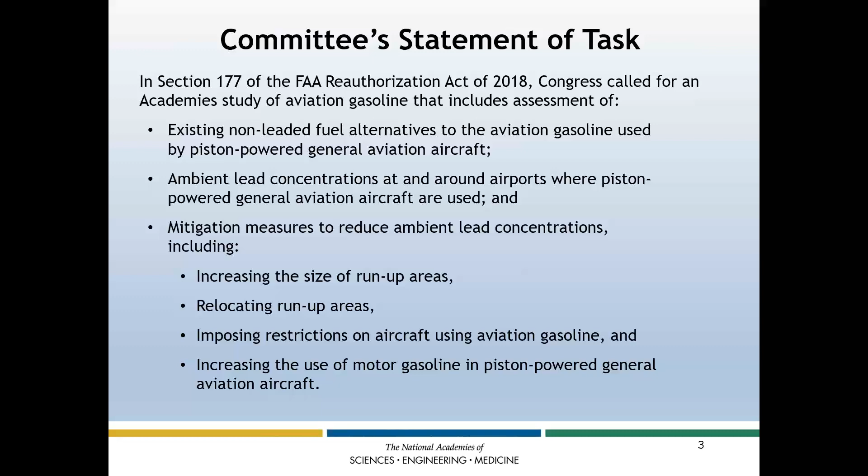Let me start by reviewing what our committee was chartered to do and how we operated. Our charter was created in Section 177 of the FAA Reauthorization Act in 2018, where Congress called for the National Academies to study aviation gasoline with an assessment of existing non-leaded fuel alternatives to the aviation gasoline used by piston-powered general aviation aircraft today, ambient lead concentrations at and around airports where piston-powered general aviation aircraft are used, and mitigation measures, calling out several as shown here, as examples, non-exclusive, of the mitigations the committee examined.

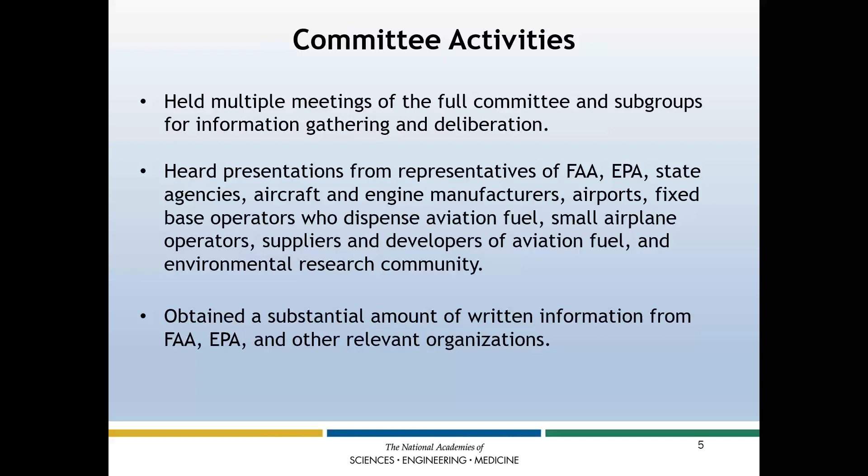The committee held multiple meetings of the full committee and of subgroups for information gathering and deliberation. These meetings included presentations from representatives of the FAA, EPA, state agencies, aircraft and engine manufacturers, airports, fixed-base operators who dispense aviation fuel, small airplane operators, suppliers and developers of aviation fuel, and the environmental research community. This was supplemented by a substantial amount of written information, and I'll note that all of the information received is in the public record.

So now, stepping into the findings and recommendations of our report. First, in Chapter 2 of our report, we outlined the findings we had as we researched general aviation, the background of what general aviation is, to help better understand the scope of the problem here.

Let me start by outlining the functions provided by general aviation. Of course, it's common to think first of the recreation and personal transport function, small aircraft owned by personal individuals. But we also recognize there are many other functions provided by general aviation. These include transport and medical evacuation, or medevac, in remote areas; flight training, even if a pilot is planning to fly large jets for an airline, general aviation aircraft are where their preliminary flight training is first required, serving as the bridge in training for larger aircraft; and law enforcement, search and rescue, and firefighting, examples of roles often undertaken by local law enforcement or other government agencies.

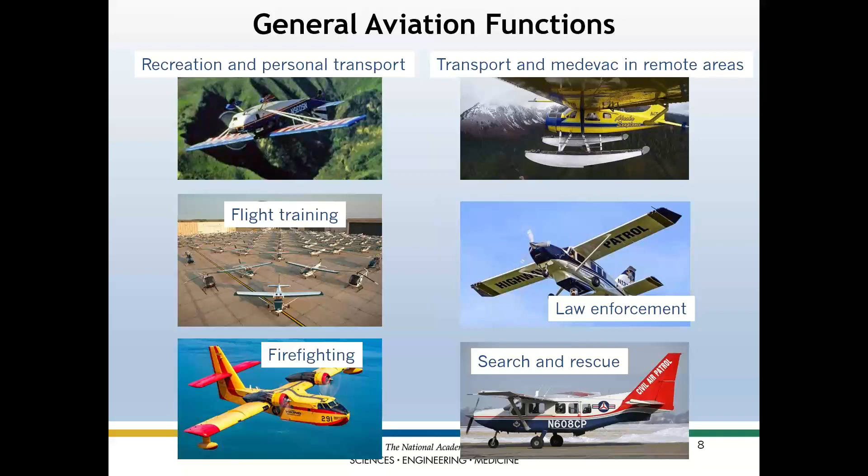Looking at piston-engine aircraft, about 170,000 are operating in the United States at this time. They serve many purposes, but fall into two broad classifications. Those personally owned, used for personal and recreational flying, comprise about 75% of the fleet. They're less heavily used.

Those used for business, government, and commercial purposes, while only 25% of the fleet, are estimated to represent 50% of hours flown. They're estimated to consume more than half the avgas, as they tend to be larger, higher performance airplanes that burn fuel at a faster rate.

Of these 170,000 aircraft, annual fleet turnover is very low, with an estimated 900 new aircraft added per year. The average aircraft age is estimated at 50 years, and designs have stayed fairly constant, especially airframe and propulsion technologies. For example, the Cessna 172, shown lower right, first built in 1955, is still in use and still in production, with much the same airframe and basic engine technology.

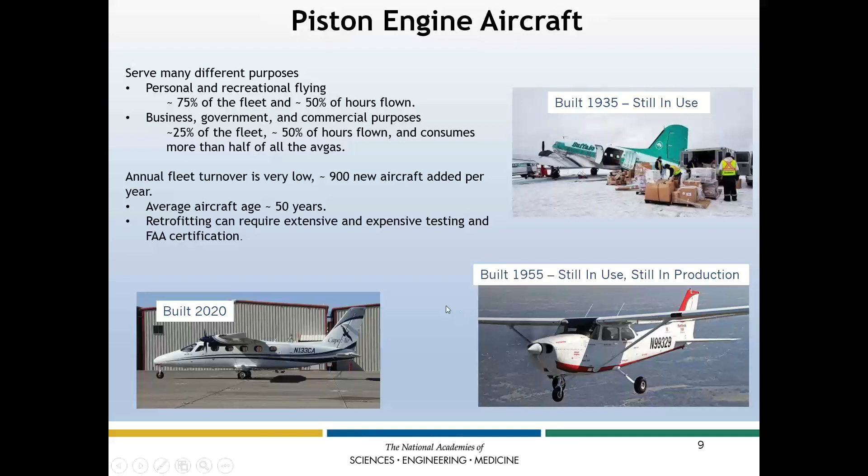When looking at lead emissions, it's important to look at the airports. Of the nation's 13,100 different airports, about 75% of the fleet is based at roughly a quarter, or 3,300 airports. The larger, busier airports are often publicly owned by municipalities, counties, or states, and are in the National Plan of Integrated Airport Systems, or NPIAS, making them eligible for federal assistance.

However, the other 25% of the fleet is based at the remaining 75% of airports, or 9,800 airports, that are not under NPIAS. Many of these are small and have limited capacity to add fueling infrastructure or to assess the lead impact of their airport layout.

Another important distinction is how different airports are. I've shown Van Nuys Airport on the bottom, which by some measures is the busiest general aviation airport in the nation, and an airport in grass with no tarmac, near my house on my drive in to work.

They have very different infrastructures and capabilities to do assessments, change their layout, or change their fueling mechanisms. They also often have very different proximity to people.

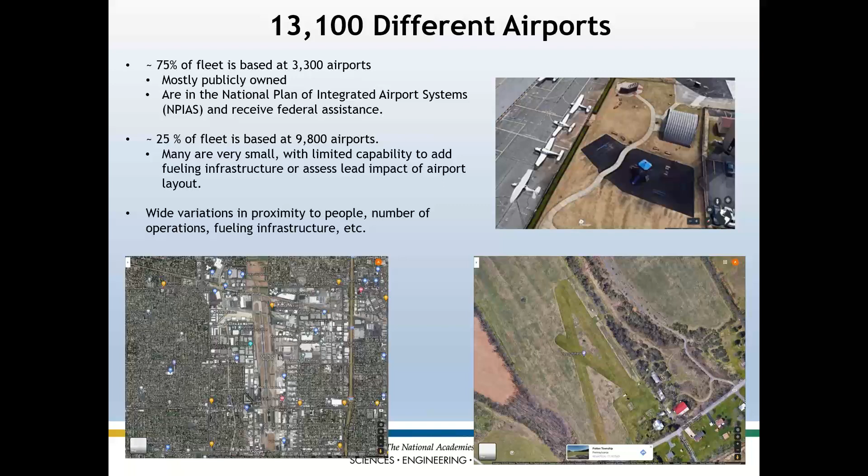Looking at lead emissions from piston-engine aircraft, one thing I learned as an aerospace engineer is that lead persists. Often with other emissions, there are assumptions that organic compounds degrade and decompose, but lead instead persists in the environment, and once emitted, it accumulates.

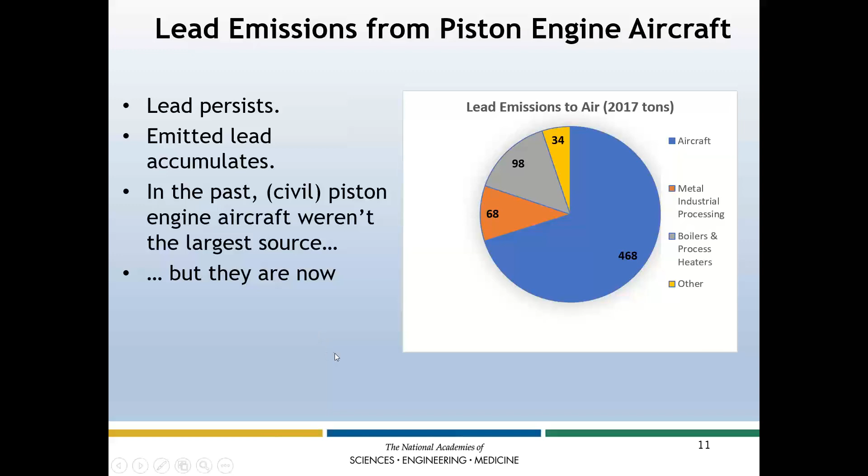Over the last decades, lead has accumulated in our environment from a number of sources. In the past, civil piston-engine aircraft weren't the largest source. However, as other large sources of lead emissions have been mitigated or eliminated, general aviation aircraft are now the largest source of lead emissions, in the context of lead having accumulated and knowing there's no known safe level of human lead exposure.

Together, the importance of reducing lead exposure is recognized by our report, and it motivates the development and implementation of measures to reduce or eliminate lead emissions and/or zones of high airborne lead concentration.

We note too that lead exposure can occur through multiple routes. The most evident in many of our research studies to date is airborne lead emissions impacting neighboring communities. But we also recognize that past emissions can be deposited in soil and other surfaces, and that occupational lead exposure for airport workers also occurs.

This can occur through multiple mechanisms: inhalation, ingestion, and dermal absorption. We can be looking at both combusted and uncombusted fuel. So there's a number of methods by which the lead can create exposure.

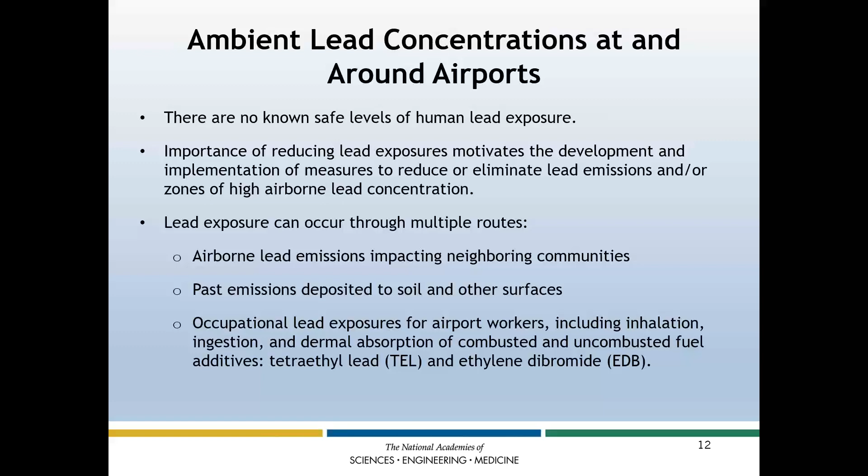Compared to other sources of lead emissions, we recognize that there are some unique aspects of aviation emissions. For example, a much smaller particle size than automotive emissions.

Studies of the health impact of automotive emissions may not translate well here, leading us to recognize that there are open questions about what the exact health impact would be. So the health impact is something we recognize, and that motivates the need for mitigations.

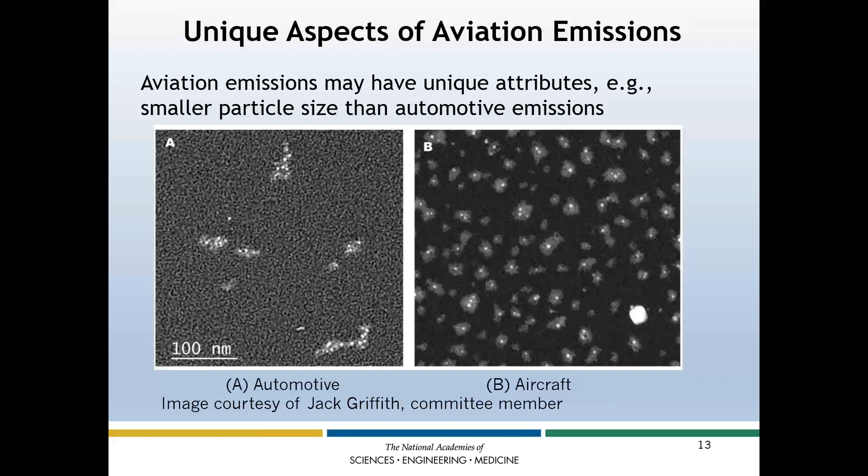Following our original charter, we studied a range of mitigations, and I'll call out two that cannot widely help in the committee's opinion. The first is that imposing restrictions on aircraft using avgas would not be a viable sole mitigation.

Restricting general aviation aircraft that use avgas, especially higher performance aircraft, would have far-reaching ramifications for critical functions that include transportation, particularly in remote regions that may otherwise have limited transportation options, ramifications for medical transport, and pilot training, among the broad functions outlined at the beginning of this talk.

Likewise, we looked at the use of motor gasoline, by which we referred to gasoline broadly produced for automobiles. But we recognize that motor gasoline as currently constituted today is not a viable unleaded alternative. Decades ago, some aircraft were listed as being able to use what was commonly called MoGas, back when motor gasoline did not have ethanol.

But with the addition of ethanol, we find that it cannot be used in the vast majority of aircraft. Ethanol can cause vapor lock, which itself can cause an engine to fail in flight, which is not a good thing for a pilot. And ethanol is corrosive to aircraft components. Yet without ethanol, automobile gasoline does not meet minimum octane requirements.

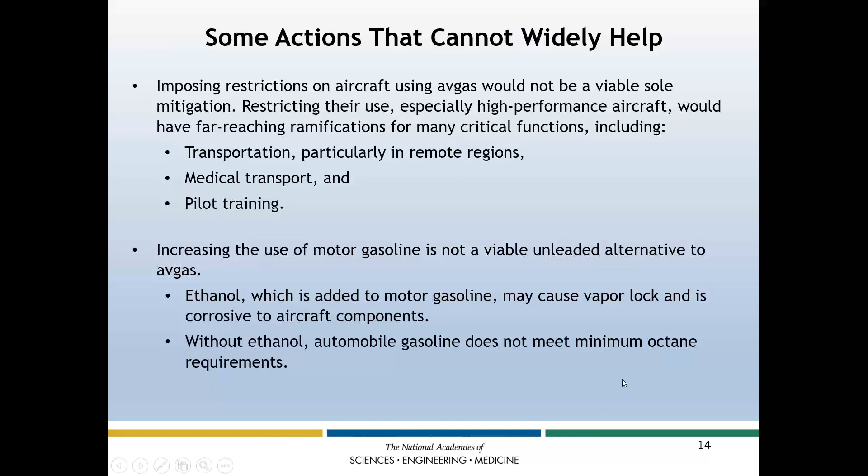From here, we would like to talk about the mitigations and actions that we do recommend. We recognize there is no single known technical solution that the committee, based on publicly available information, felt certain to be available in the near term. Instead, we recommend a multi-pathway approach.

We recognize that the ultimate development of a drop-in fuel, one that can be used in all current aircraft yet without lead, should be pursued and would be a good solution. We will talk about each of these in more detail next.

But also, we recommend examining parallel pathways: ultimate development of new propulsion technologies that do not require leaded fuels, and in the interim, some mitigation pathways focused on modifying airport operations and practices and on using existing fuels and aircraft to lower the amount of lead and reduce its exposure to populations.

This is a big, hard challenge, in that implementation will require the participation of many across a very diverse industry, including private, corporate, and public entities. This includes pilots, airport managers and personnel, fuel suppliers, aircraft propulsion, and airframe manufacturers.

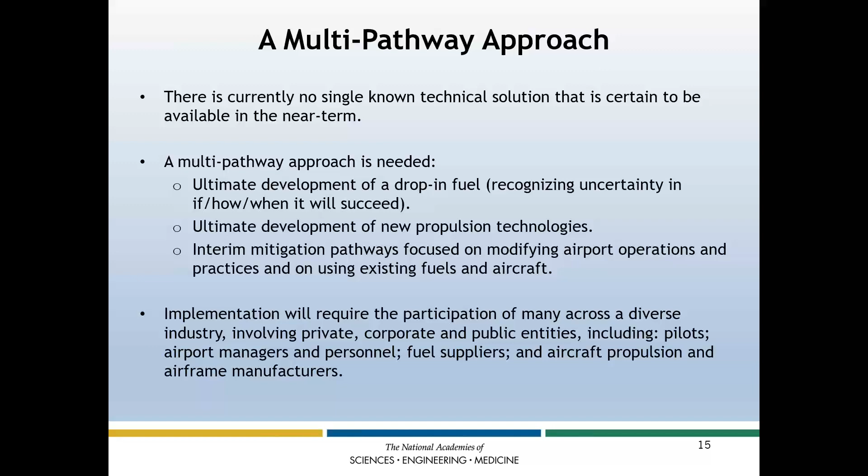So our first recommendation is that the FAA, recognizing and building upon what they have been doing so far, should further coordinate its efforts to reduce lead pollution and exposure at airports, coordinating with other federal agencies that have key responsibilities for protecting public health, safety, and the environment at airports. This includes their longstanding coordination with the EPA, but also other agencies such as OSHA that would be concerned with the occupational health impacts of lead.

We further recommend that they collaborate with these agencies to explore the regulatory and programmatic means within their respective jurisdictions that they can each bring to bear and combine in a complementary manner to reduce lead emissions and exposures at airports.

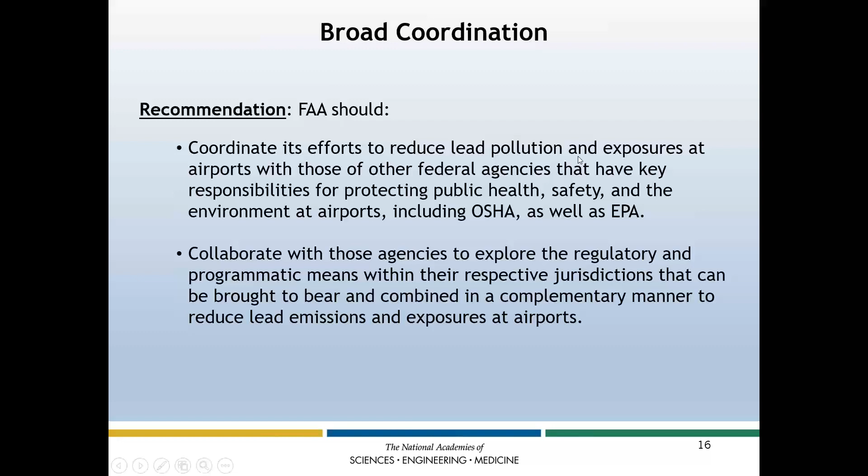Another thing we look at is pilot and airport personnel practices. These photos are snaps I took on my phone the last time I went out to fuel an aircraft at a nearby airport. I was curious, I hadn't really looked before. There's a lot of big signage noting the compelling concern that aviation gasoline is flammable and that multiple safety checks are needed. But was there a mention of lead?

It turns out, at least in this anecdotal case that reflects our broader experience, there's one sign you can see on the self-fueling pump where it says contains lead, but that sign is then obscured once one opens the panel to start fueling. I use this anecdotally to reflect the broad finding of the committee that there is scarce mention of lead health hazards in FAA-related materials for flight training, aircraft maintenance, airport management, and guidelines for refueling to avoid spills and emissions.

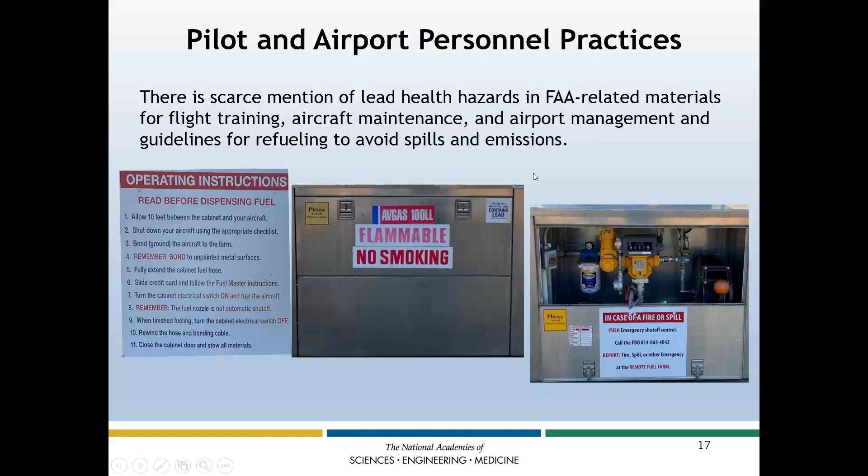So we recommend that the FAA should initiate an ongoing campaign for education, training, and awareness of avgas lead exposure that is targeted to GA pilots, aircraft technicians, and others who work at airports.

We recommend they partner with prominent organizations within the general aviation community. The campaign should be multi-pronged by ensuring that information on lead risks and mitigation practices is prominent in relevant materials for pilots, airport management, and aircraft technicians. Where appropriate, the information should also be covered in the relevant certification and licensure examinations. This information should be featured on FAA and GA organization websites and included in written materials distributed at GA industry conferences, trade shows, and fly-ins.

In addition, looking at airports, we recognize that the FAA has not updated its run-up area planning guidance to reflect the results of air quality studies that suggest the desirability of moving airport run-up locations away from where human activities occur, both on airport and in neighboring communities, and moving them away from high traffic locations such as runway ends where lead is emitted from aircraft taking off.

So again, based on my own experience, I brought in a satellite view from Google Maps of a particular airport known for having a Burger King, a Fairfield Inn, and an Izzy Steakhouse right next to the airport. I overlaid the airport surface chart, pointing out that there is also a run-up area on the other side of the chain link fence from these businesses.

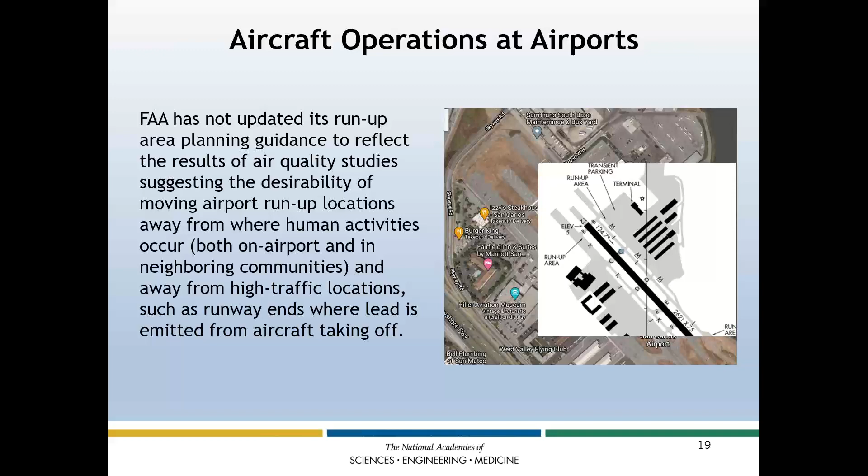So with this, our committee's recommendation is the FAA should update its guidance on the location of run-up areas to reflect the results of research since the latest interim guidance was issued in 2013. This guidance should include the need to account for both the emissions of engine run-ups and takeoffs, recognizing that these emissions may combine, creating even denser hotspots when analyzing the geographic distribution of lead emissions at the airport.

Indeed, the emissions here, we mentioned run-ups and takeoffs, also include places where the aircraft may idle while waiting for pre-departure clearance, and so forth, looking at where the lead is getting distributed. The purpose of this guidance should be to support airports' decisions of whether to move run-up areas to reduce people's exposure to lead emissions, while also accounting for other concerns, including safety and aircraft noise.

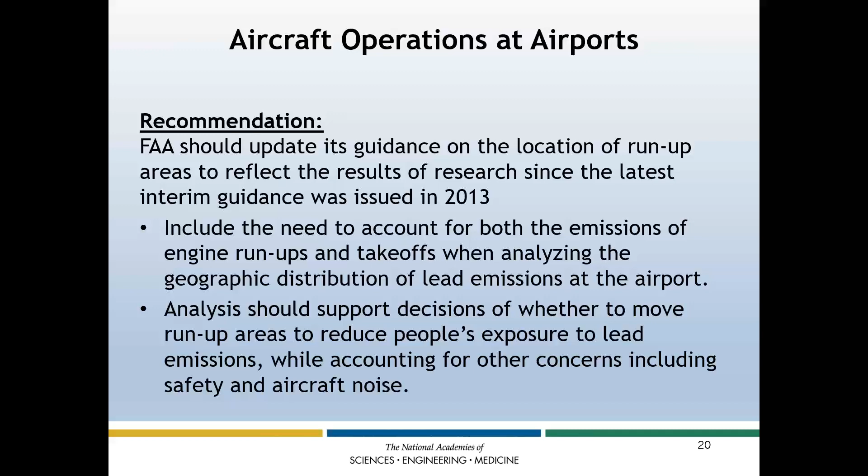So these are the mitigations and recommendations looking at changing aircraft operations in airports. Next, we looked at existing specified fuels and fleets.

We note there are two other fuels with ASTM certification that would apply to all or some of the fleet. Let me start with 100 very low lead. It has the same octane rating as the 100 low lead currently used, but its ASTM standard requires nearly 20% less maximum lead content. This fuel, if produced, could be used by all piston engine aircraft. The fleet-wide use of 100 very low lead could reduce total lead emissions from avgas by up to 20%.

Another fuel under consideration, usable by an estimated 57% of the current fleet, is unleaded 94, the only existing grade of unleaded avgas. It would require a second supply chain for fuel and a second fuel distribution system across the nation, including second fuel dispensing systems at airports. Consequently, widespread availability of unleaded 94 is likely to be restricted to a portion of airports that have or can afford to add the required fueling facilities.

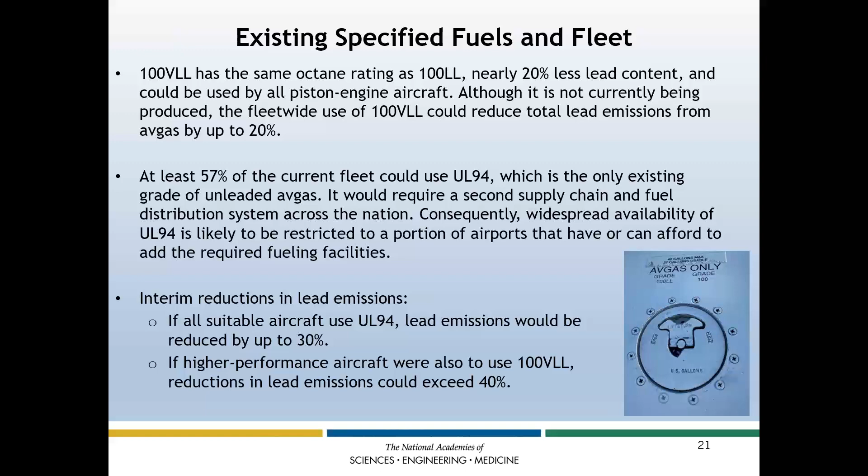Put together, we recommend looking at these two fuels because of the interim reductions in lead emissions that could be created through the use of fuels alone, while lead-free solutions are developed. If all suitable aircraft use unleaded 94, lead emissions would be reduced by up to 30%. If higher performance aircraft were also to use 100 very low lead, the combined reductions using unleaded 94 where possible and 100 VLL for aircraft that need it could exceed 40%.

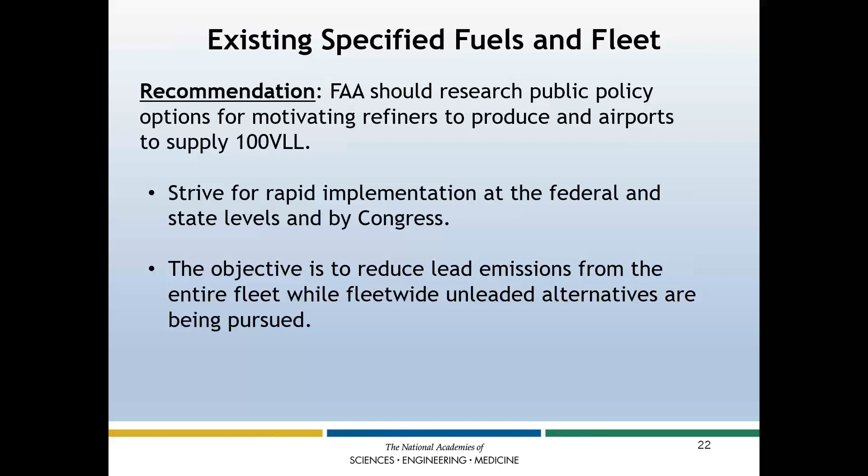With this, we have the recommendation that the FAA should research public policy options for motivating refiners to produce and airports to supply 100 very low lead fuel, striving for rapid implementation at the federal and state levels and by Congress. Likewise, the FAA should research public policy options to enable and encourage greater use of available unleaded avgas, or UL94. Possible options include issuing a special airworthiness information bulletin and providing airports with incentives and means to supply this unleaded fuel, particularly airports eligible for FAA-administered federal aid, notably those under NPIAS.

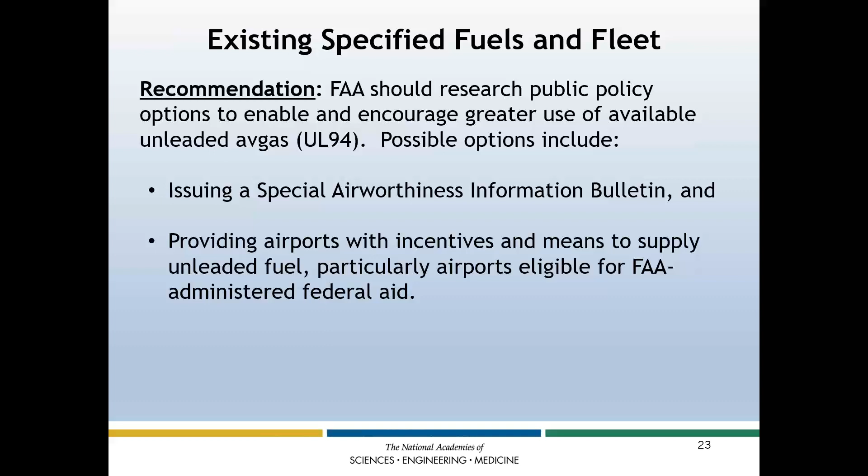Finally, a mechanism should be established for facilitating the increased availability of existing grades of unleaded avgas across the fleet. Congressional involvement would likely be needed, such as by providing incentives for pilots to use existing unleaded avgas and for more airports to add the required fuel storage and dispensing capacity. So with this, we have recommendations at the FAA, noting that congressional involvement would likely be needed, promoting the use of current unleaded fuel that can be used by part of the fleet, or very low lead fuel that can be used by all of the fleet.

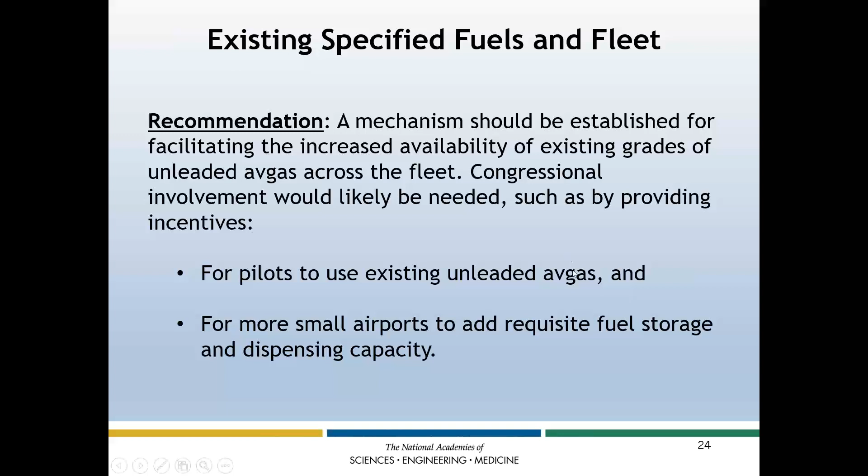Next, we recognize the search for lead-free fuels that can be used by the entire fleet. For several years, the Piston Aviation Fuels Initiative, or PAFI, has sought the development of an unleaded fuel that can drop in seamlessly into the fuel dispensing and supply chain and can be used by all aircraft. It has not yet yielded a viable replacement, but it has led to the development of a fuel testing and evaluation process. It's prompted supplier interest in developing replacement fuels and sought solutions to many challenges associated with supplying an unleaded replacement fuel. These are all valuable, indeed necessary, steps towards the development of a drop-in unleaded fuel.

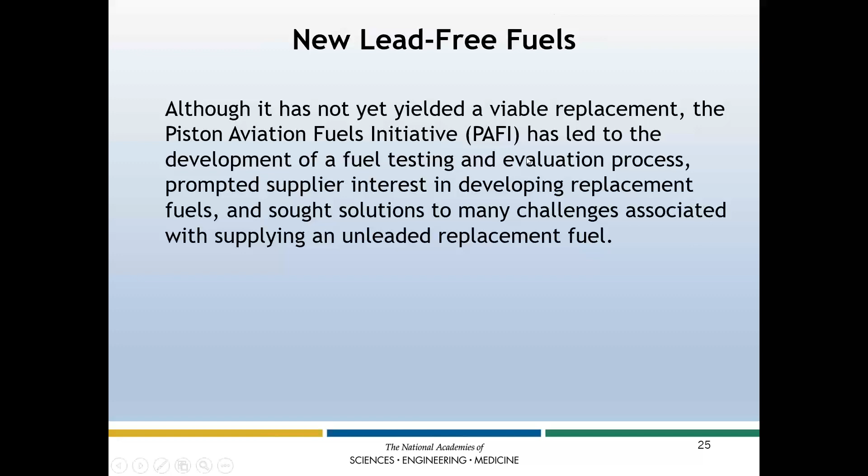So with this, we recommend the FAA should continue to collaborate with the GA industry, aircraft users and airports, and fuel suppliers in the search for and deployment of an acceptable and universally usable unleaded replacement fuel. The collaboration should be carried out through PAFI or an alternate similar holistic process, and should be carried out by making available the needed testing facilities that support FAA approvals.

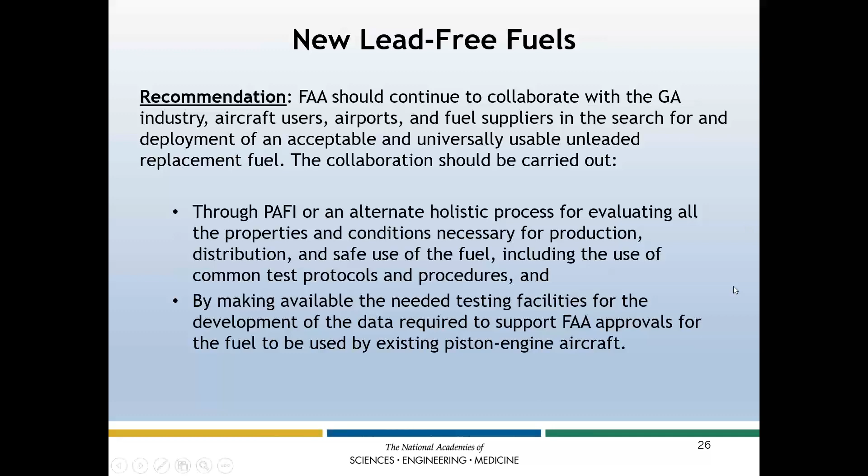Further, this recommendation looks at changing the fuel. We also looked at lead-free propulsion systems. We recognize that small aircraft pose unique engineering challenges. The propulsion systems have to be small, lightweight, and reliable enough that they won't leave the pilot without power mid-flight. Different mechanisms come up when looking at these, including attempting to miniaturize systems used by larger aircraft, such as diesel, turboprop, and turbogenerator, or looking to new electric and alternate fuel engines currently being experimented with. We note that these technologies, whether miniaturizing bigger systems or looking to new systems, are currently not certified for broad use. They are generally listed as experimental, and as such, the remaining challenges in front of them—certification and retrofit costs—can be prohibitive.

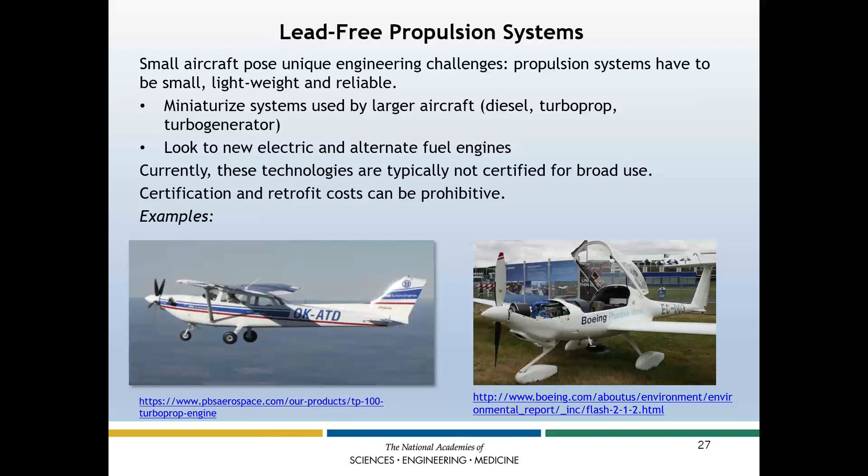With this, the committee recognizes that incentives are needed to develop new technologies to expand the use of currently available unleaded fuels in terms of new propulsion systems that can use them. We recognize that the slow turnover rate of the GA fleet would limit the transition to new technologies, at least without new incentives for the retrofits and changes that would be required.

Therefore, we have several recommendations. The first: a clear goal should be established that all newly certified gasoline-powered aircraft, after a certain point in time, be approved to operate with at least one ASTM-approved unleaded fuel. An additional amount of time should be identified by which all newly produced gasoline-powered aircraft, including those built based on older type certificates, would attain that same goal. We recognize that this would probably require congressional action to establish the goal and timeframes.

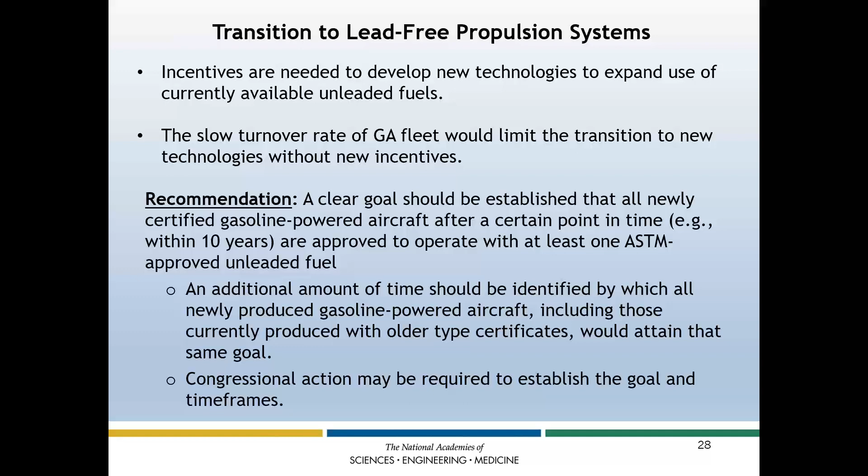Likewise, further incentives would be needed to develop these new engine technologies, and the slow turnover rate of the GA fleet would limit the transition to new technologies without new incentives. Taken together, this creates a long timeline. To get this solution brought to bear, we need to start now. So our recommendation is that FAA initiatives should be used to promote the development, testing, and certification of safe and environmentally desirable lead-free emerging propulsion systems, including diesel, electric, and jet fuel turbine engines for use in GA aircraft, including the requisite airport refueling and recharging infrastructure.

We see this involving collaborations with industry and other government agencies, such as Aeronautics Research at NASA, and congressional encouragement and provision of resources may be required.

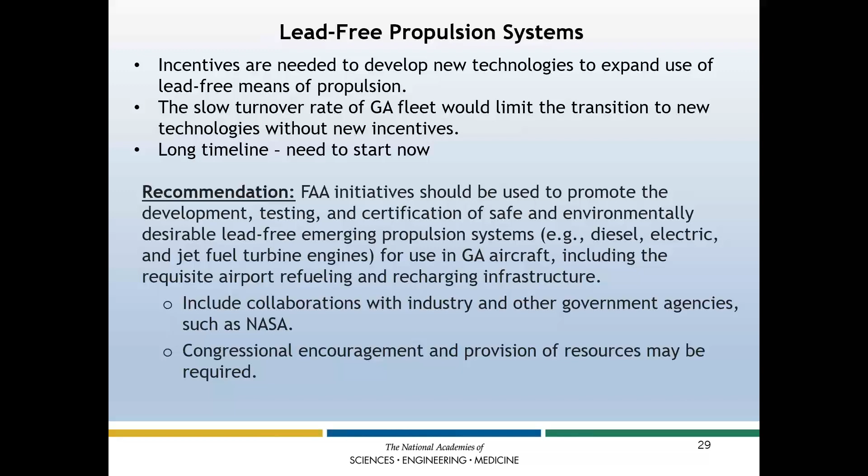To put this into scope as to timeline, I show here a chart that Bob Mitchell prepared for our deliberations, looking at the notional timeline. If we started here today in 2021, when would we have a typical four-seat GA aircraft if we use different propulsion systems? Going left to right along the horizontal axis, we're looking at the timeline, and looking vertically, we're looking at the endurance of the aircraft in terms of flight endurance in hours, which also directly scales to the range of the airplane. The current day piston engine aircraft highlights the efficiency achieved with current day systems.

In comparison with other systems, we see that we either have very low relative energy density, such as pure electric using today's battery technology, resulting in an aircraft that, between the weight of the batteries and the new systems, would have a very limited endurance and range. Better endurance and range with other systems such as turboprop and diesel and turbo generator, but again, recognizing that these are more experimental.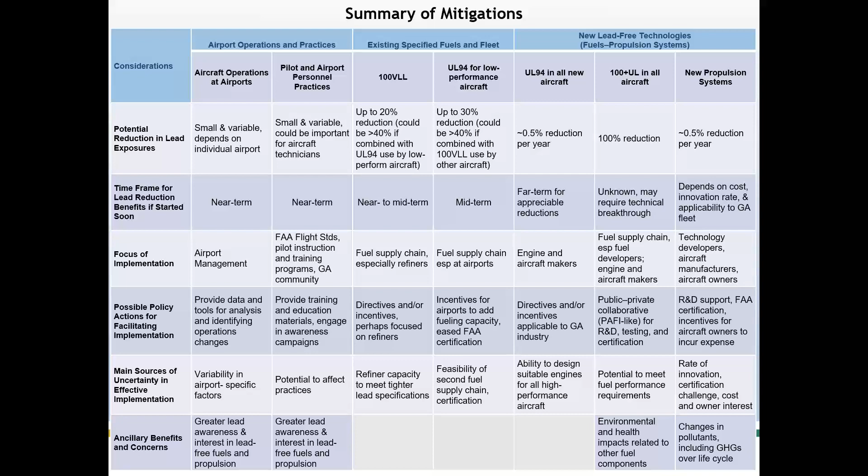Finally, our committee recognized that there are places where further study, understanding, and information would help inform these mitigations. One is mitigations at specific airports, looking at our ability to model and predict the airborne lead concentrations around airports. We looked at the ability to better assess the feasibility and effectiveness of airport-specific mitigations. This would benefit from an improved understanding of how these are reflected by individual airport characteristics.

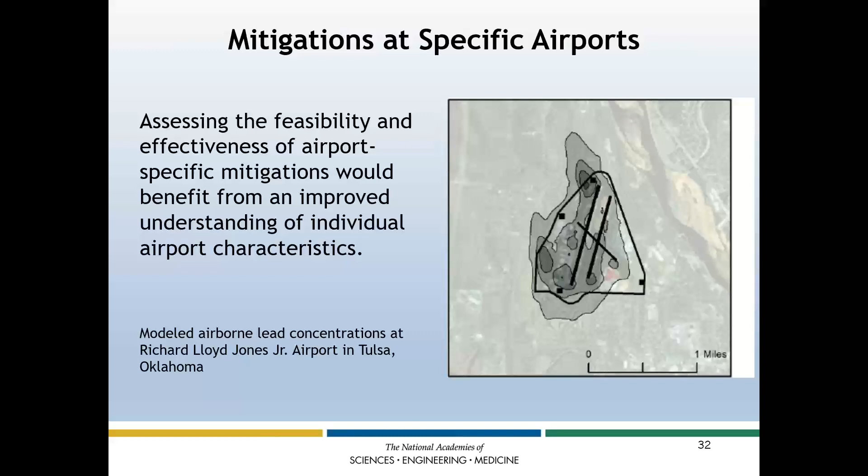So we recommend the EPA should conduct more targeted monitoring and enhance computational modeling of airborne lead concentrations at airports of potential concern, as indicated by a recent screening study, to evaluate aircraft operations that are main contributors to lead hotspots, and to design airport-specific mitigation measures.

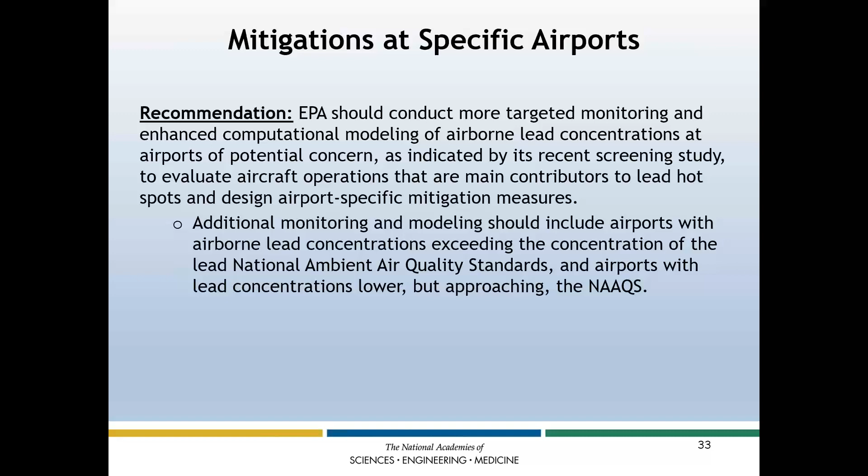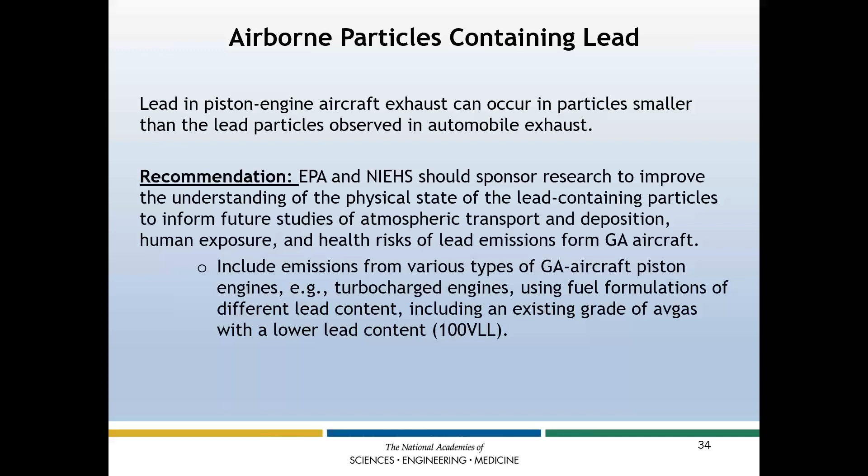Also, as noted before with the electron microscope photographs made by Jack Griffith on our committee, lead in piston engine aircraft exhaust occurs in particles smaller than those observed in automobile exhaust. Therefore, we recommend the EPA and NIEHS should sponsor research to improve the understanding of the physical state of lead-containing particles, to inform future studies of atmospheric transport and deposition, human exposure, and health risks of lead emissions from GA aircraft. This would include emissions from various types of GA aircraft and would need to account for the impact of using a different lower lead content, such as that found in 100 very low lead.

And then finally, looking at the routes of lead exposure, we have focused on airborne emissions. We recognize its value. We also note that past emissions from piston-engine aircraft that have been deposited to soil and other surfaces can contribute to present-day lead exposures at locations within and near airports. So we recommend the EPA and NIEHS should sponsor research to enhance the understanding of lead exposure routes and their relative importance for people living near airports and working at them.

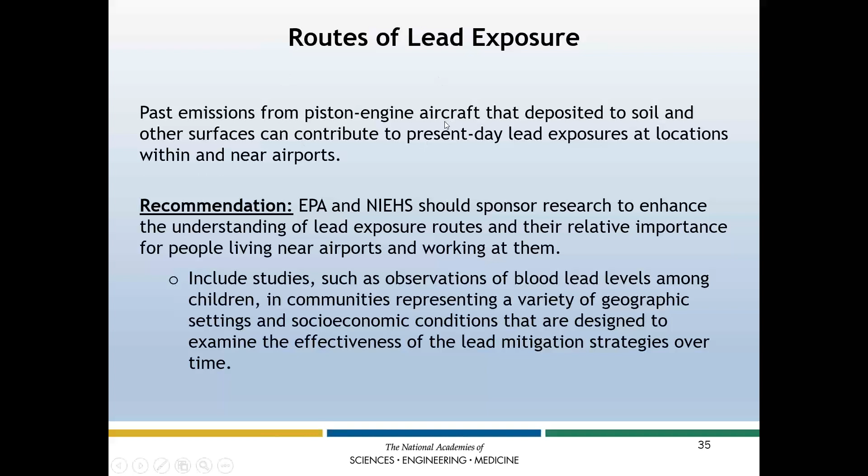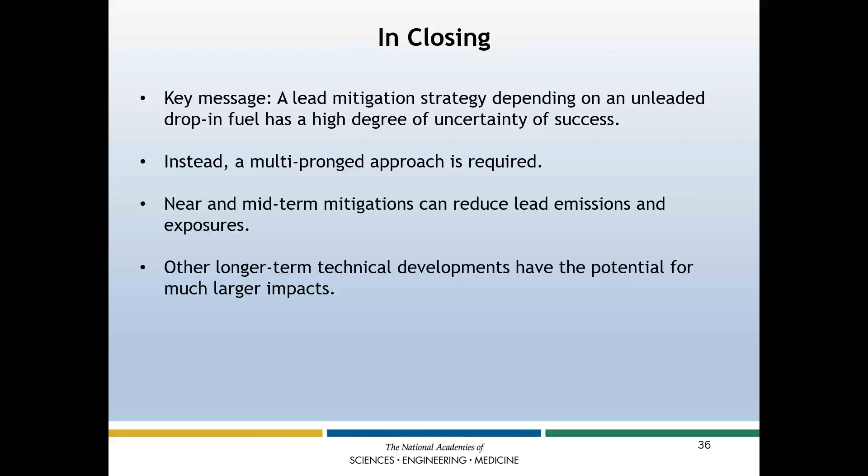In closing, a key message here is that we could not find one single mitigation that we had confidence and certainty would, in the near term, eliminate lead. So instead, we recommend a multi-pronged approach. Near and midterm mitigations can reduce lead emissions and exposure, and other longer-term technical developments have the potential for much larger impacts. And with this, we'll move to the questions. Thank you for your time.